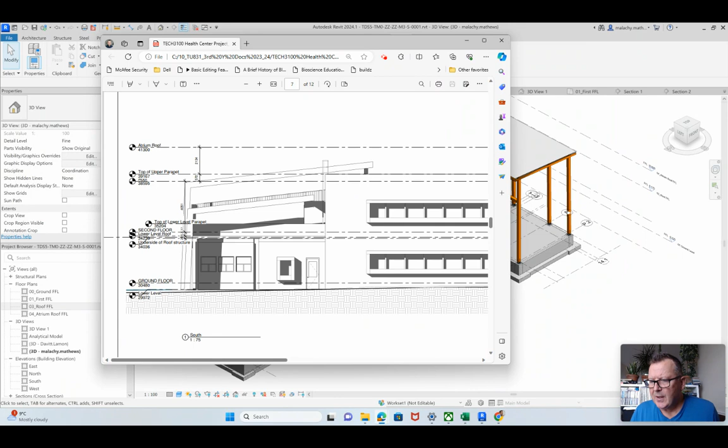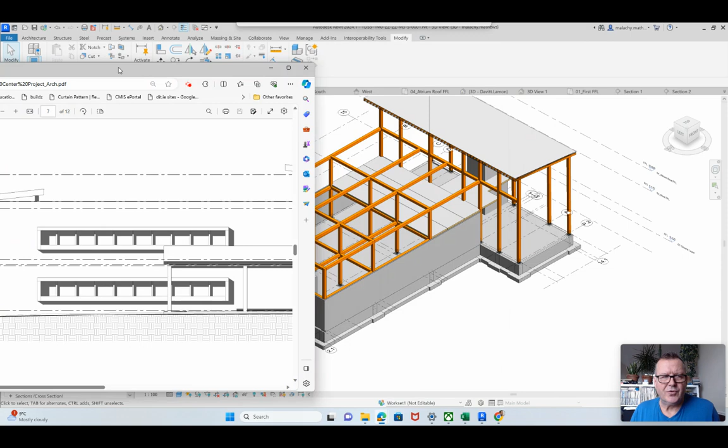Now, just another piece of work that needs to be done here. I'm going to bring across the PDF here. Now, you can see that there's these two feature windows here that need to be built in. And so that's what I'm going to do here. Only have to do it once, because if I do it on the ground floor, I'll be able to take all of the units and copy it and paste it up here into the first floor, which is handy enough to do.

So you can see that that's an extrusion out from the wall, built in the factory and then brought out to site. The decision you need to make with this: building this unit here is pretty simple enough. I'm going to show you how to do that. It's the strategy for the windows in here really that need to be thought about. So I think what I'm going to do is I'm just going to create a large opening inside the extrusion here, and I'm going to build that with a curtain walling.

And I'll have, if you like, vertical supports for the CLT panels above here, built into the mullion, if you like, of the curtain wall. I think that's how I'm going to go about doing it. Other ways would be to literally perhaps leave the wall in and just place windows to size and shape to go in there. That's another way of going about it. So I haven't 100% decided as yet. But first thing I'm going to do is build the extrusion here. I'm going to show you how to do that.

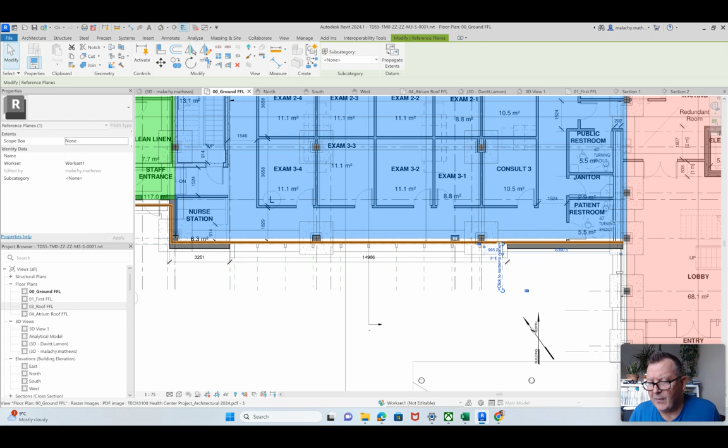Okay. So we're working on this wall here, and I'm going into my ground floor plan. So what I've done is I've created a whole series of reference planes. Okay. Simple enough to do, all the way around there. So I've gone to the inside here of that one, and on the inside here of that kind of frame there. And I put a reference plane in for each of the mullions, if you like, that'll be going in. So this is the wall that's in the background. So that's a solid wall there at the moment.

Now, as I said, we could take that wall out by selecting the wall and going into the profile and doing it that way. We could slip a window in here. Now, remember, this is the CLT wall, so it's only the structural piece. We still have to finish this. So that's why I'm kind of thinking that maybe a curtain walling the whole way across there might do the trick as well. And in these positions here, we can have vertical supports built into the mullions, which will support the CLT panels up on top, something like that. So that's kind of my idea, my strategy there at the moment.

Right, so I'll go into the south elevation. Here's all my reference planes that I created. Okay, so where are we? So I think that the windows go from this point here to that point there, and so I've set these out according to the section on the plans as well. So I think I'm 900 off the ground here.

I'm making the windows 1800, so that's 2.7, which would just about come in under the ceiling level in there, which is around 2.8, 2.93, I think, something like that. If we need to drop it down 100 or 200, we can do that as well. So 900 plus 1800 puts the vision of a person standing there more or less in the middle of the window. So I'll go about doing it that way.

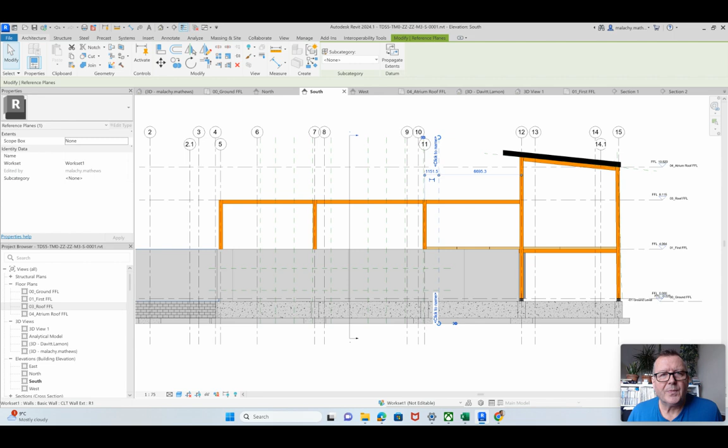So we're up to Architecture, Component, Model In-Place. So what are we going to model? Well, we're going to model a wall. And we'll call it walls 1 or walls 2, whichever. It doesn't really matter. And we'll hit OK. So what are we going to do? We're going to do an extrusion. Before we do that, very important. Let me just cancel that.

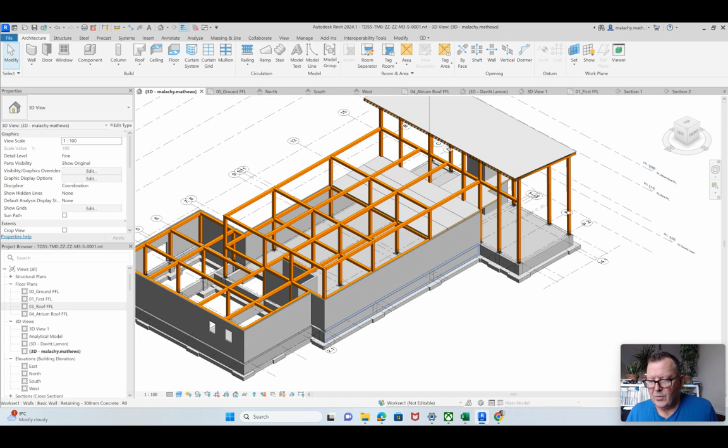So we're going to have to build this on a reference plane. So you saw the reference planes that I created here, but, and this is the important one, I've created this reference plane. So that runs at the front of the CLT wall the whole way through, and I've called it GF window, okay? Because that's the one we're going to make active, and that's the one that we're going to model on. All right, we're going to model on that one.

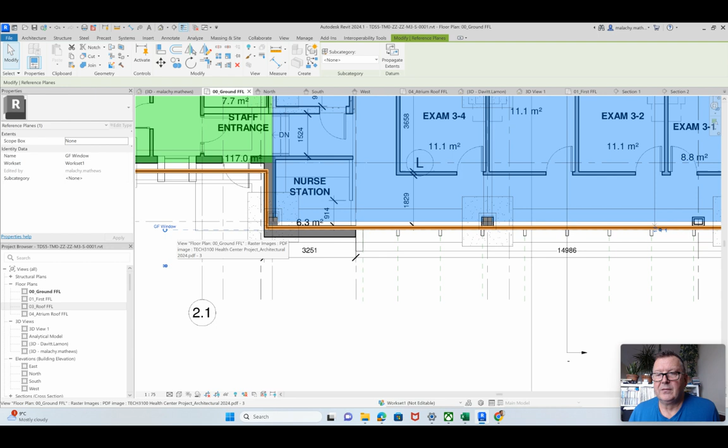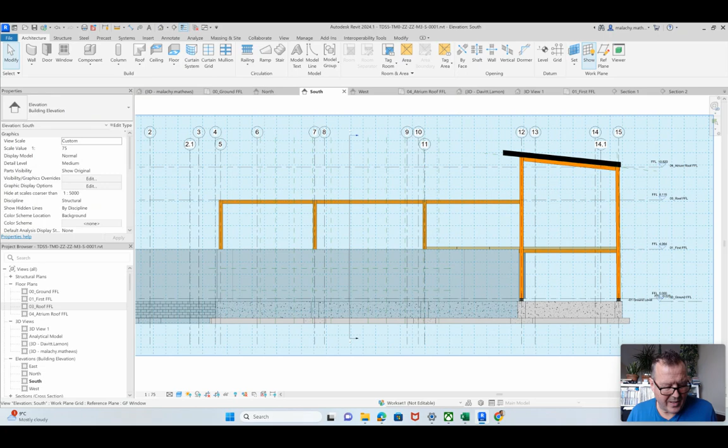Okay, so let's get back to the south elevation here. And I'm going to go into Architecture. Before I do my model in place, I'm going to say Set the work plane, hit the drop down box. Here's the GF window, the reference plane that I created. Go OK, and just to show you that, that's it there. All right. If we go into a 3D and hit Show, you can see, I'd have to set it independently there if I wanted to do that.

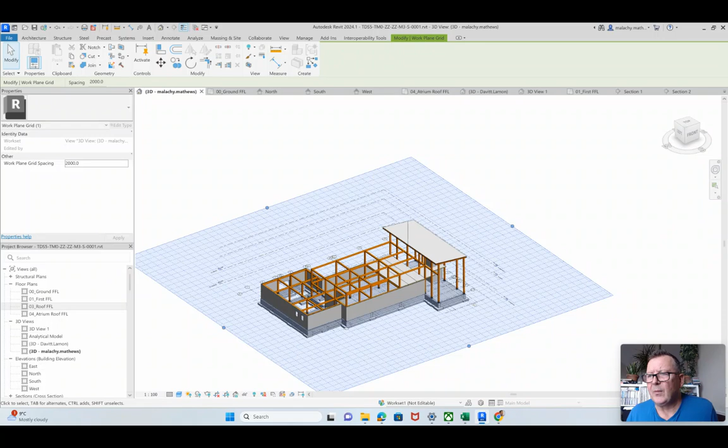And still on that way, but it's actually on the south elevation. Yeah, so it's vertical there. That's what I want to draw on there, basically. Okay.

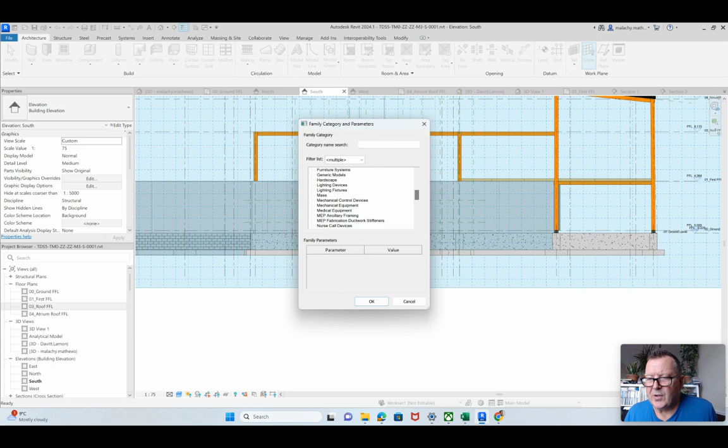Right. So let's go. Now we're going to component, model in place. So I'm drawing on the elevation, if you know what I mean, in the position where that reference plane is. And what are we drawing here? Okay, so we're going to draw more walls. All right. Click OK, and we're going to do an extrusion. And now I'm just going to model in some sketch lines here.

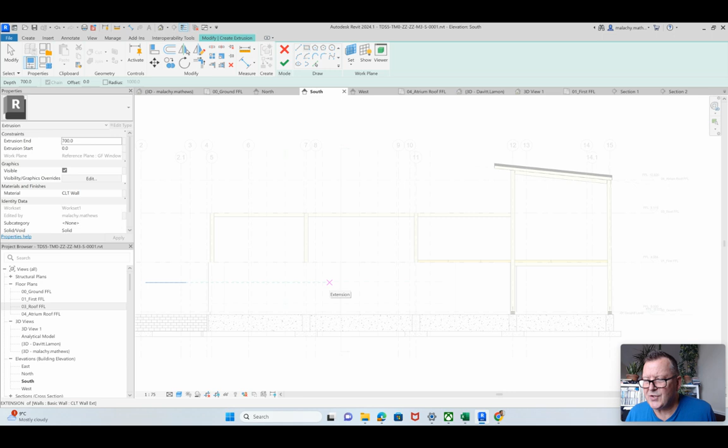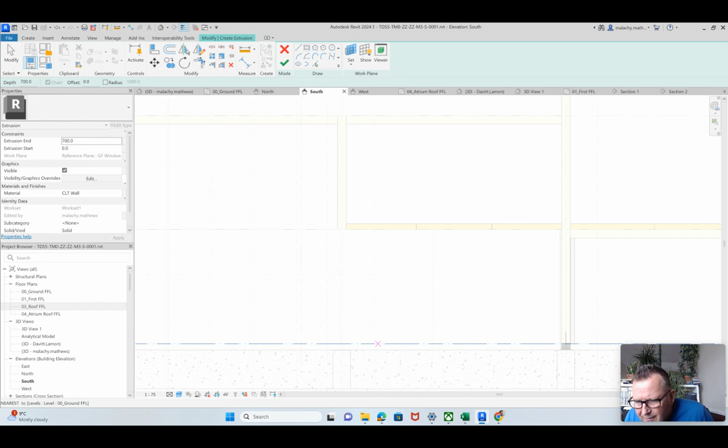So a little bit hard to see, so I might just turn off the showing of the reference plane. The reference plane is still active, but I just turned it off there. It's just a little bit tricky to see here. Get there. And see my reference planes. Okay. So, do you know what I'll do here? I'll just cancel that.

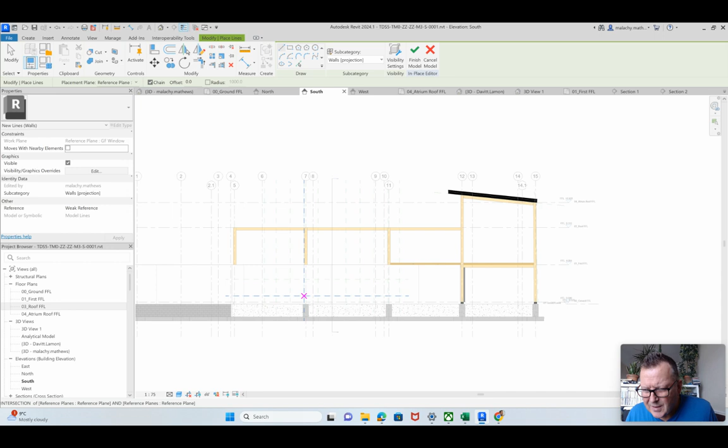Just go back into here. Turn the visibility of that off. I might just use some model lines. I just can't see. There it is there. Okay, so I'm going from intersection there to intersection here. All right. So it's the window.

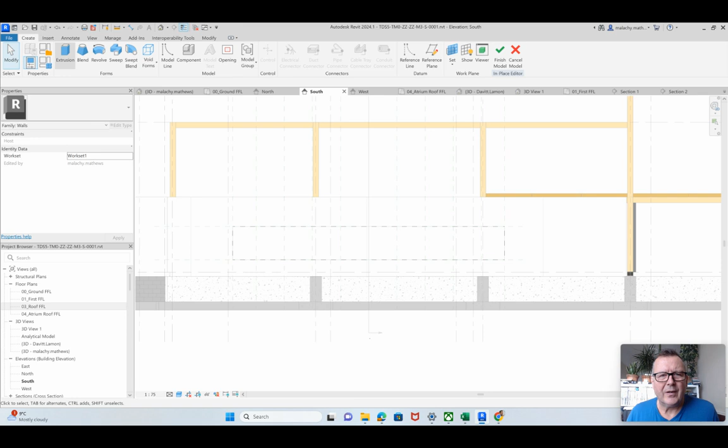All right. Now that I can see it, I will go back to create extrusion. Again, let's just pick that one now that I can see it. Okay. Now I'm going to go into my offset tool up here, and I'm going to offset it at 250. See up here, numerical 250, and we'll offset to the outside there. All right. Now, by doing that, what I've done is that I've created the solid that I'm going to extrude is going to be within these lines here.

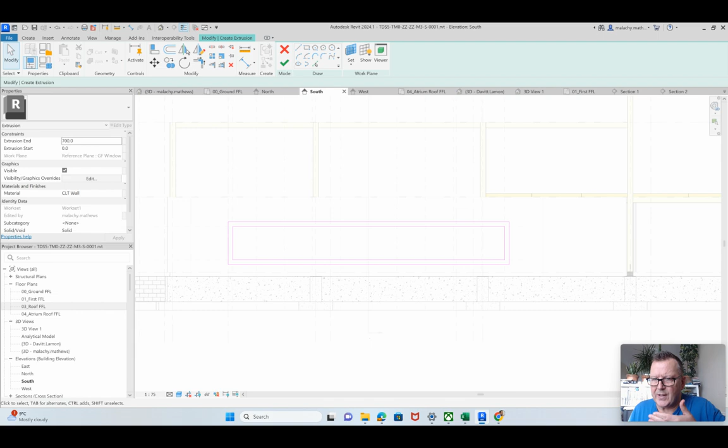And the extrusion end and start, so the start is 0 and the end is 700, and that should push this out towards me. And if I do this in 3D, you'll see that. Okay, so we'll finish. There's the extrusion. And then what I want to do is I want to put a material on that. So I've got my CLT wall material. Okay, so I'm putting that on that. I'm going to finish the model, and that's that one there. All right, so we've created that.

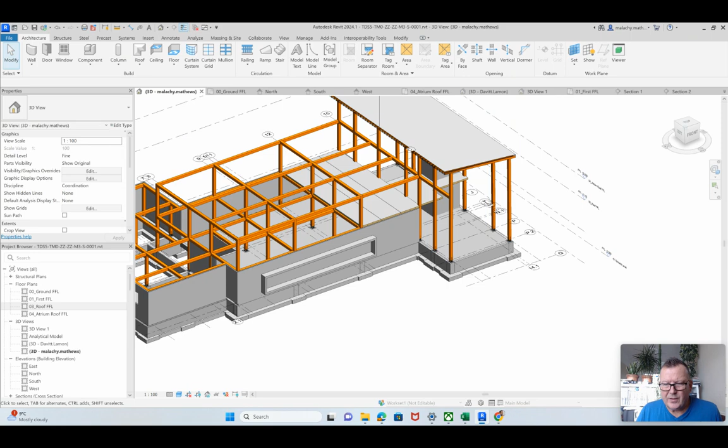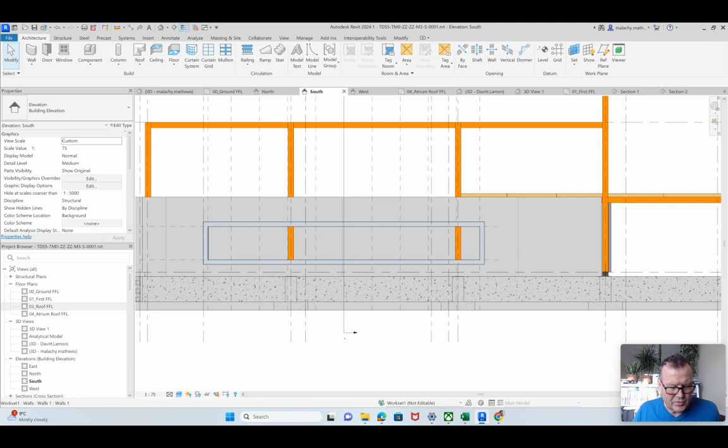Okay, so now I'm back into my south elevation here. Got that created. So I'm going to pick the wall, and I'm going to say now edit the profile of that wall. And I'm going to do similar, create the box in here like so. All right, and that should be that. Let's just check that in 3D. Yeah. So there's the opening there. Now I'm not going to do the curtain walling in the structural models. All I'm doing is creating the OPEs there for the moment.

All right. So now I'm going to take that and I'll edit its selection. This here. I'm going to copy that up there. And now I'm going to paste it to a selected level, and it's going to go to the first floor. Okay. Maybe it needs to go to the second floor. All right. So we'll just undo that. Come out again. Okay. Copy and paste to selected levels. I thought it was the first floor I did there.

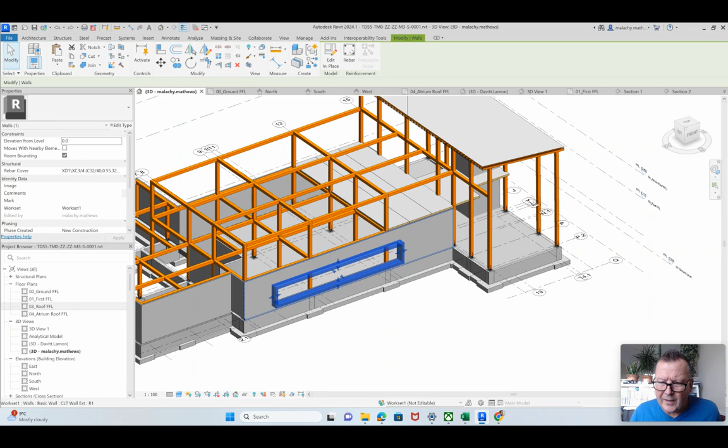Okay, maybe it's working its way down, so we'll just undo that again. So select and copy, paste to selected levels. There you go. All right. Don't know why it was fooling me that way. Okay, so you got that basically set up there for you now.

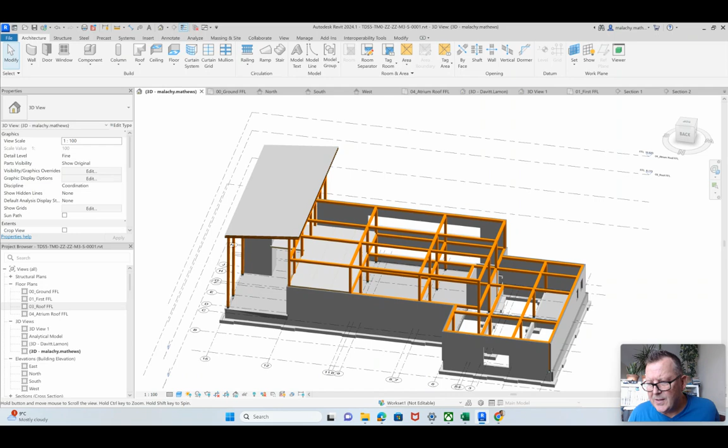So what's left to do in this structural model is I have to put in my CLT base for the roof here and here. I have to finish out any other CLT. I've got CLT over here again. So let's just pick that one and go copy and then paste into, okay, set one there. All right, and then I can pick it and extend it out over to here, so on.

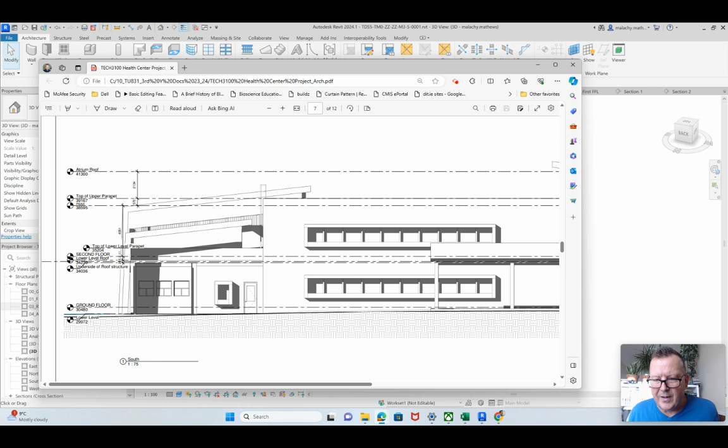So it's the exercise now of going through, getting all your walls in place, and then creating the opes in each of these according to your elevation diagrams here. So you can see there's another little extrusion there. So you've done it here. You can do that again there. There's a door to go in there. There's windows to go in here. On the back, there's all those windows, a couple of doors on that.

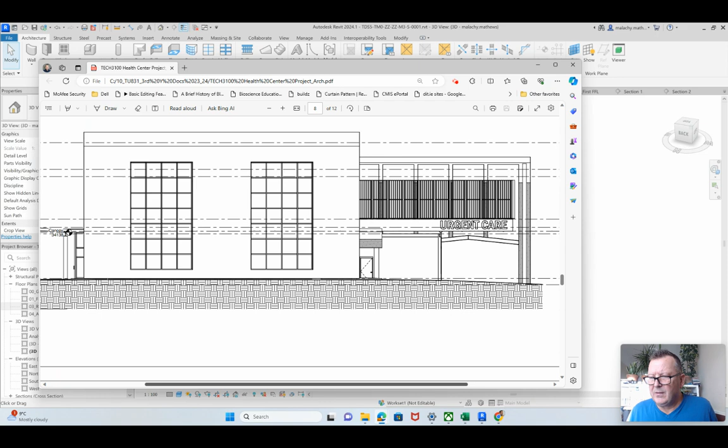So just go through each of the elevations, window here. And then at the back, that's the big curtain walls that we'll be putting in there. There's a door here. So again, you need to go through and create all of those openings, because what you're going to be doing in the architectural model is creating the finished wall, if you like, and you'll be inserting windows and doors into maybe that finish, rather than the structural.

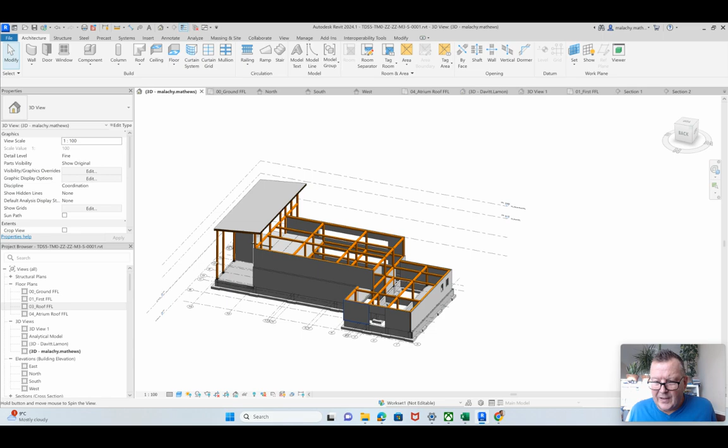Now, there's a good point. Are we going to do it that way or not? So I'll have to have a little think about that and see if that's the right way to go about it. But however, look, you created both of those things there, and you could do the same for the one that's happening here. Okay, that'll do for this video for the moment.